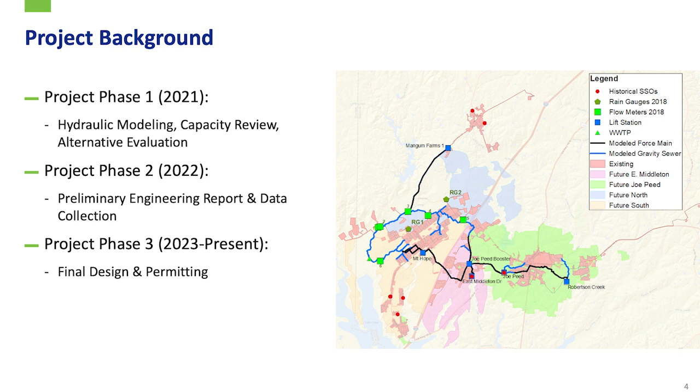Okay, again, so taking a step back, this is going to be a recap of some information we've presented before. We began with doing some flow monitoring in your system. We did some additional monitoring, pulse monitoring that was done before we got involved. And we utilized that information to determine what the wastewater flows in your existing system are. So we have average daily flows shown here and peak daily flows. And we have a couple different planning periods.

So the existing conditions, which was back in 2021 when we did the analysis, and then a forecast of 2045, and ultimately what we deem build out. And the locations shown here are a couple of the key points along the project area where we were taking a look at those capacities. So not going to get too much into the details on these numbers.

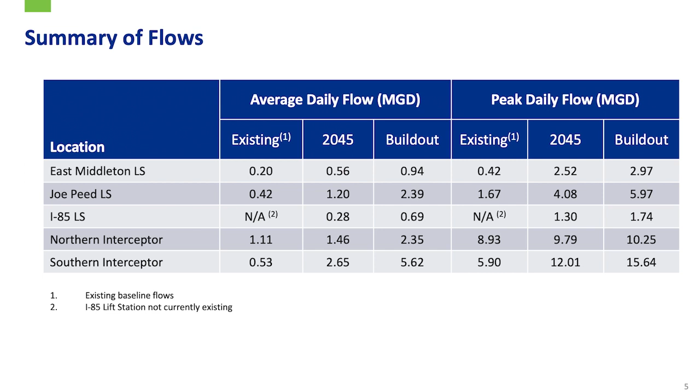The gist here is, if you just look at, for example, peak daily flow for the Southern Interceptor, the existing system sees around 5.9 MGD. By 2045, we're projecting that could get upwards of 12.01 MGD, 12 MGD. That's a significant increase in flow, right? And that's a positive. That's a good thing. That means there's growth and there's interest in the area and there's great opportunities with that. So that's a very positive situation. On the next slide, though, we'll talk about some of the challenges that come with that.

So after we developed the flows, we used a hydraulic model to input those flows into your system, into the model. And then we had kind of the backbone of the system, the large diameter pipes, the larger pump stations.

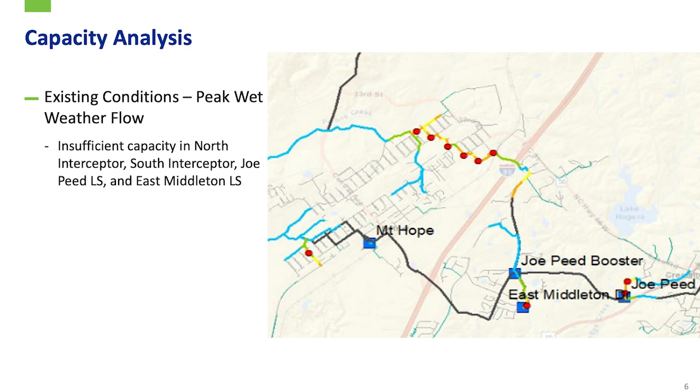That's a rain event. And you see a red dot at Joe Peed lift station, red dot at East Middleton lift station. We've got a red dot on the bottom left-hand corner. That's a Southern Interceptor or a branch to the Southern Interceptor. And then a bunch of red dots there towards the top of the page. So that's the Northern Interceptor. So that's definitely a choke point in the system. So now we know where the problem areas are. We know where the limitations are in your system.

The next step is to look at a bunch of different alternatives for how we can address those. That can be increasing the pipe size. That can be adding a new pump station. That can be shifting flow in different directions to get it off of an area that's struggling to an area that maybe has some additional capacity. So we looked at a number of different alternatives, worked with Scott and his team on those. I think these were presented to the board in 2021. Culminated that down to about 5 alternatives total.

And we looked at a number of different options or factors that could make way into the decision on which alternative is the best. We looked at cost. We looked at permitting challenges. We looked at operation and maintenance challenges. And we pulled all that information together. And ultimately, the SGWASA board and Scott decided alternative 5 was the option you wanted to go with.

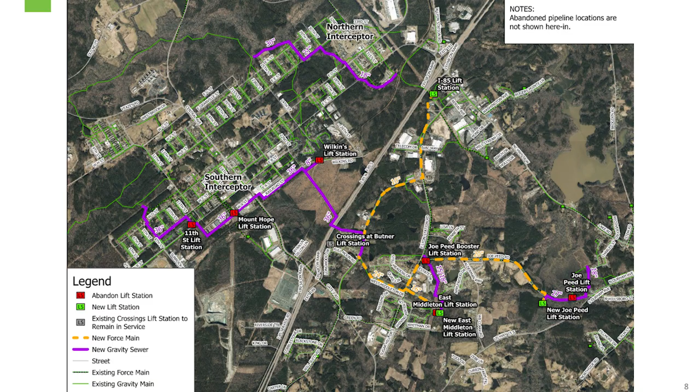What size is that 30 flowing into once the purple runs into the green? So that's a really good question. So that is actually a 24 for one short stretch, and then it's going to transition to a 30. Now, why would you transition a 30 to a 24, right? Why not just do that extra 30? Well, the reason why is there's a creek crossing there, and that pipe is already exposed. So if we upsize that pipe across a creek, it's going to create more of a backup within the creek, which is going to be more of a floodplain. It's going to raise the floodplain elevation in that area, which is going to be more of a challenge to get permits. It's going to require a higher mitigation fee that SGWASA has to pay.

And we did the hydraulic evaluation to show that one stretch is fine. It doesn't create a problem hydraulically in your system. So keeping it really made a lot of sense. It saved a lot of money. It made the permitting a lot easier than what it would have been. And then you're in a 30 immediately downstream of that. That's a good question, yeah. And we did work with the state on that to get confirmation they were going to allow us to do that before we made that decision.

So after we did that initial evaluation, we started into a preliminary engineering evaluation. This is where we worked again with Scott and his team and Joel to really dig into the details of those improvements, right? We were at a very high level at that point. We know we want to get that pipe from A to B. Now the question is, how do we get it from A to B?

We can take a lot of different routes to get it there, and that can make a significant influence on what the cost is. For example, if we're crossing more pipes, if we go down 28th Street instead of 29th Street, that's going to add money. If the ground elevation is 10 feet higher on this street than this street, then that's going to add a significant amount of money because it's a deeper excavation. So we try to optimize the alignment to minimize the cost, but also give SGWASA the capacity it needs in the areas where it needs it.

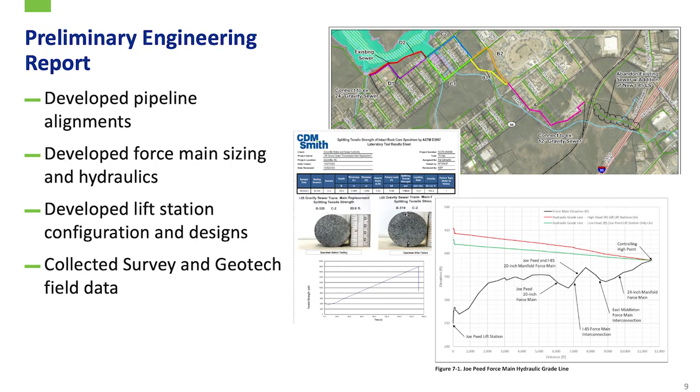We also looked at force main. We looked at a more detailed hydraulic evaluation, again, to try to right size it, if you will, for what you really need. We looked at the lift station configuration. How can we set it up such that folks like Joel and Robert Jackson can maintain this thing? I can put down on a sheet of paper what I think is right, but ultimately those are the guys who are out there doing the work. So they need to say, yes, this makes sense for us. So we worked with them to do that.

And then we started collecting survey and geotechnical information. So we went out and did a lot of survey. You probably saw a lot of paint on the ground. That was the subsurface utility investigation. And then all the geotech, we did a lot of borings. There were drill rigs. You may have seen them out there on the side of the roads, drilling holes. Particularly important for when we're going under Interstate 85, for example, that we know what we're going to be encountering when we've got a 60-inch tunnel running under the interstate.

And how low do you have to go under 85? How far under? Really far under. So it's kind of elevated to begin with. And our trench is around 10 feet deep. So I want to say we're around 20 feet. Does that sound right, Bud? Around 20 feet below Interstate 85.

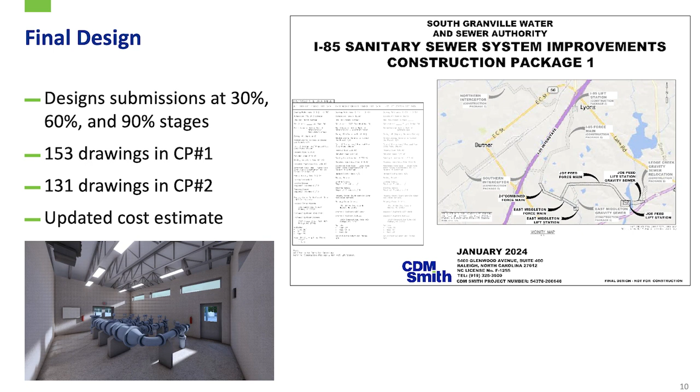So we've worked through the preliminary phase. We know what we're going to do. Now we're in the design phase. We're putting together plans. These are 24 by 36 inch design plans that have all the detail. We're putting in specifications, the binders that have all the details the contractor needs. We've got about 284 drawings right now. I think that's going to go up a couple, but we have a significant number of drawings that we're putting together for this effort. It's a big job.

We've met with SGWASA at different design intervals. So when I say 30, 60, 90, what that means is around 30% of the way through the design, we sit down with SGWASA and say, okay, here's what this is going to look like. Give us your feedback. Yes, you want this pipe here, but you don't want it here. You do like this type of pump. You don't want this type of pump. Going through those details and giving SGWASA the opportunity to comment along the way. So hopefully the end product is what Joel and Robert and others envisioned it would be, because they were part of the decision-making process. And then we've been providing cost estimates along the way as well.

All right, so that was the background. I'll pause there. Any more questions before I move on to the next topic? Michael, just not a question, but a comment. Would you just explain what the board members are seeing on this screen as far as the image?

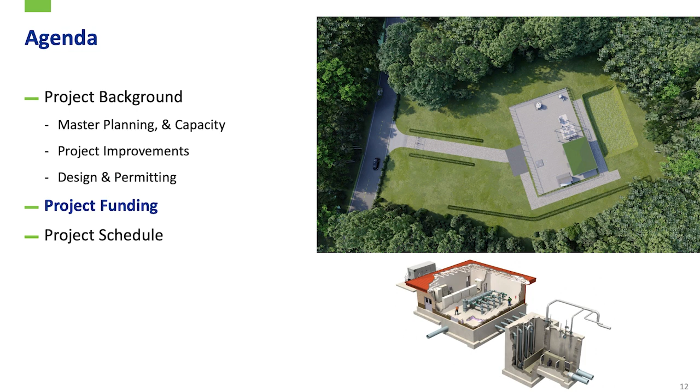And then the section to the right of that is going to be the below ground feature. So that's where the pumps are actually located. So there's pipes coming in. The gravity pipes are sending the wastewater in there. The pumps are actually in the wastewater, and they boost it up and send it through that pressurized pipe, the force main, and send it down towards the wastewater treatment plant. Thank you.

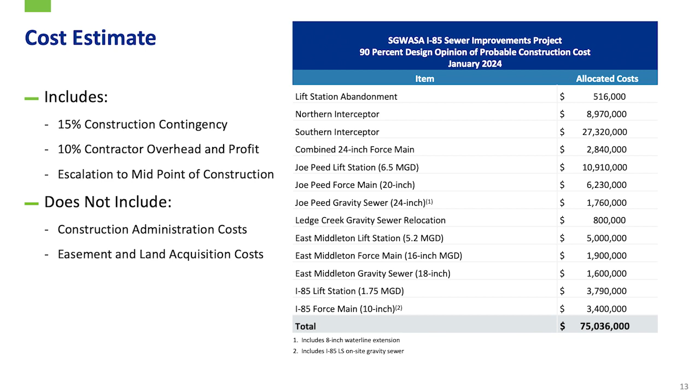Okay, so our cost estimate, again, talking about project funding, we've been providing cost estimates along the way. This is the latest one. This was from January. It has a total fee of $75 million and change. And it includes, without getting into all the details, a 15% contingency. We were higher earlier. As we progressed through the project, we lowered that contingency. 10% for overhead and profit for the contractor, and then escalation to midpoint of construction. That's essentially factoring in escalation as prices escalate throughout the years. This is pushing it to around the middle of the project.

So if we start construction next year, this is going to be roughly a 3-year project. What are the prices going to be? Not today, but what are they going to be in 24 months from now, for example? Not included in this are construction administration costs and easement and land acquisition costs. So this is just the actual construction. All right. And 75 million is a big number. And I guess the next question is, how do we fund that?

The next source of funding is going to be the USDA. So working with Rural Water, I know Scott provided an email recently to you all on a major milestone. Very excited that after a lot of calls, a lot of emails, a lot of documents, they've approved everything, and SGWASA has been tentatively approved, of up to $35 million. We'll finalize the numbers when the bids come in. So we'll see where the bids come in from the contractors, and then that will help decide how much of that loan you actually decide to take, because you don't have to take the full 35.

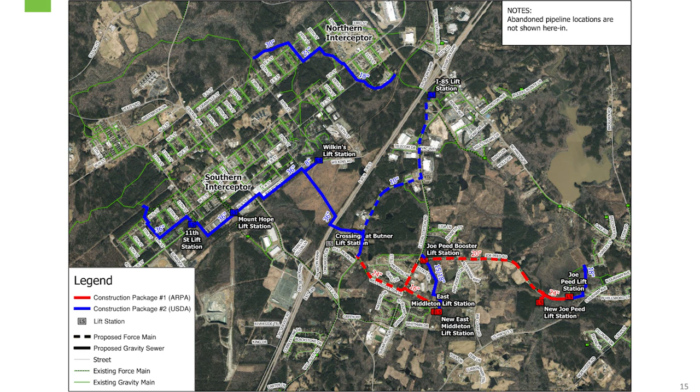Okay. And those are important because we worked with Scott to identify what components of the project we can get designed and permitted the fastest, so we can get it on the street, advertise it, and get a contractor in place by the end of this year. Again, that's the deadline. So we came up with what's in red there and said, okay, we feel like we can get all of that done in time for this year to meet that deadline. So that's an important component to that.

Another important piece to this is we put together our estimate for how much we think it is, right? But ultimately, it's whatever the bids come in at. What's the contractor going to say it is when we put it out on the street and they submit the bids to us? So we need to have a lot of flexibility, because what if they come in, hopefully not higher, but what if they come in lower? And we've set it up with Scott that you can pick and choose different components of the project to try to get as close to the dollar amount that you want to achieve.

That's very complicated. I simplified it. It's been very complicated. I think Bo has had a lot of headaches trying to figure out all the details, but I think we've got a pretty good plan in place to where when we open those bids, we're ready for what comes our way, whether it's higher or lower, or maybe we got it perfect. I don't know. We'll see.

And then the second package in blue, we're going to advertise that a little bit later, because there's some components that are causing us to take a little bit more time. USDA has a few more hoops we have to jump through. There's some environmental impacts on the project that are going to take a little bit longer to permit. So we said, okay, we'll put those in that package, where we don't have the same hard deadline we do with the ARPA money, and we can advertise that a little bit later.

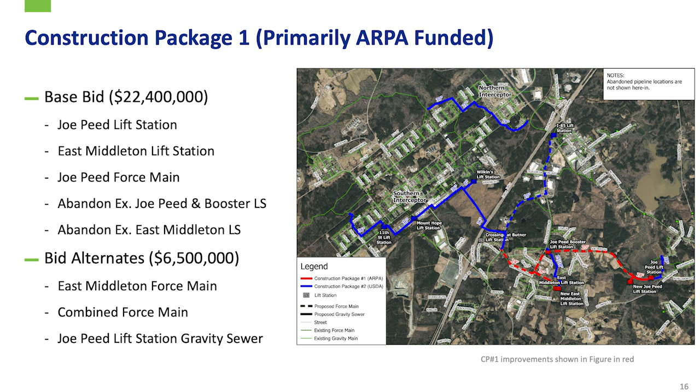Okay. Our hope is that all of that comes in within the price that we have, and all of it gets constructed as part of this package. That's what we want. And we've kind of set it up that way to hopefully achieve that. But a lot of things can happen between today and when we actually advertise that could influence that number. When is that proposed advertised time for the red? So we'll put it out for bids, notify all the contractors probably in late July to August timeframe. I think August is probably realistic because it's a larger project. We'll probably give them 6 weeks to put a bid price together.

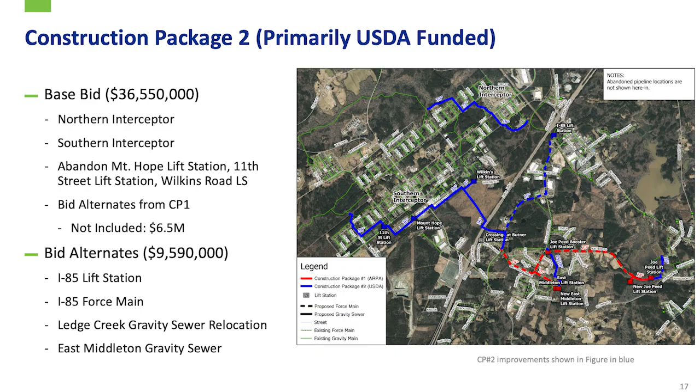I'll tell you, it's a difficult market, and it's hard to get 3 bids, which is what North Carolina requires the first time. So if we give them 6 weeks and 2 contractors come in and give us bids, we can't look at them because it's only 2. We have to have 3, right? Okay. So if that happens, we'll re-advertise. We'll work with Scott to figure out a duration, a week, 2 weeks, whatever we think is appropriate. Then we'll accept those bids again. Hopefully we get 3. The more bids, the more competition, the better.

But if we don't, and we only get 2, then we will open those 2. And as long as one of them is a responsible bidder, they meet the requirements, then SGWASA can accept that bid and move on. So to answer your question, I didn't really answer your question. You said July to August, somewhere in that time to advertise? Yeah. And then we'll open bids in September, probably, maybe October if we don't get 3 the first time around.

Ideally, they are. Ideally, we get good bids and we build everything. But if the bids don't come in where we want, or they don't come in lower than we want, then those can be put on the shelf, set aside. And then as the improvements that we're going to construct are done and more development comes in and additional revenue comes in, then you can put those projects out for bid and construct those because they will have already been designed at that point.

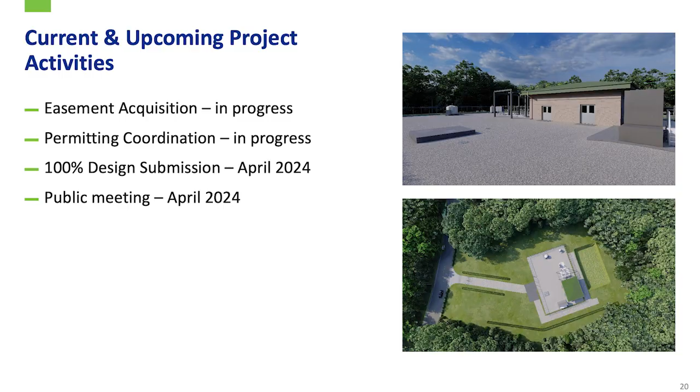And I think that's it, the presentation. I have another question whenever y'all. I'm sorry, I'm taking all the questions. Do you have a number of companies that follow CDM Smith? Bidding companies that normally follow y'all to bid these jobs?

So we have a lot of contractors that we work with because we design a lot of projects, right? So what we'll do prior to bid is we'll reach out to a bunch of contractors, and we've already had discussions with them and say, hey, here's this project. If you're interested, you may want to submit a bid. This is where we're going to advertise it. So there's a slew of those.

Because of the size of this project, that's the issue. Yeah, that's large. We might get contractors from out of state. We are a national firm. So the good part about that is if a contractor's coming from another state or even another region, what we'll do is we'll reach out to our offices in those areas and say, hey, tell me about your experience working with this contractor, because I may not have worked with them before.

I mean, that happened on the job not too long ago in Fayetteville. We had one come from Tennessee, never worked with them before. I called up our Tennessee office, and they gave me a lot of good information, helped me prepare for what was to come.

Excellent. Okay. Anyone else? Any questions? Okay, anything else? That's all I got. Great answering the questions too. Thank you. Got lucky. Well, thank you. Yeah, appreciate the opportunity.